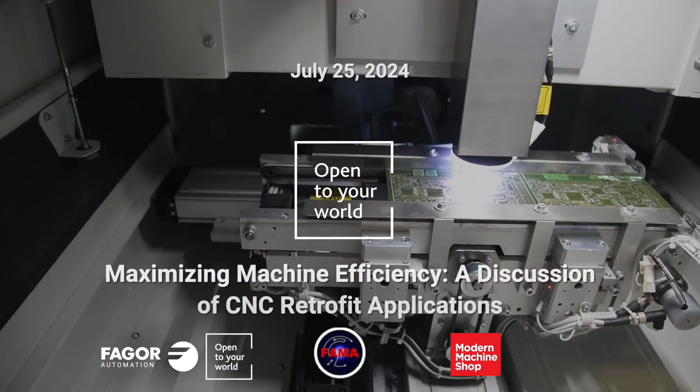Good afternoon, everyone. We're thrilled to welcome you here today for our Modern Machine Shop panel discussion on the benefits of CNC retrofitting, as well as some compelling case studies.

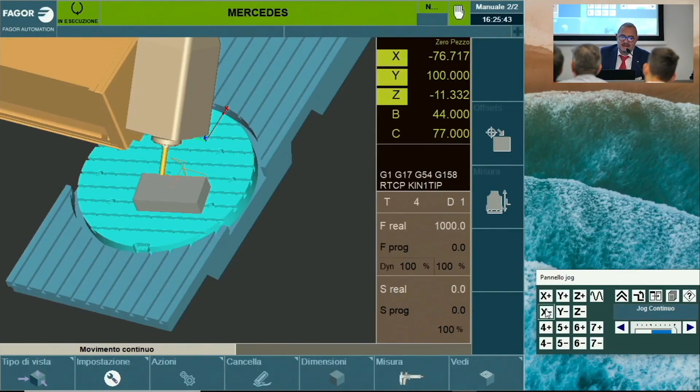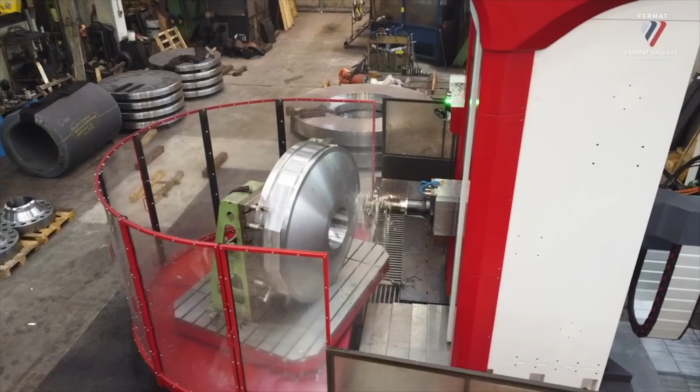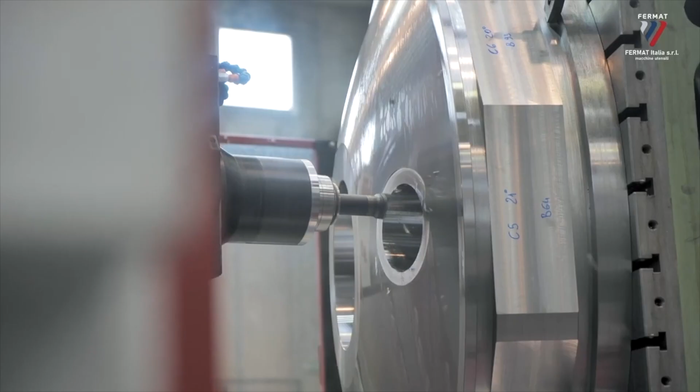Now, back to the topic at hand. There's no denying that investing in a fresh new machine from an OEM can be a game changer for any business. The latest models come with cutting-edge technology, advanced features, and enhanced capabilities that promise to boost productivity and precision. New machines can streamline processes, reduce downtime, and deliver superior performance, making them an attractive option for companies looking to stay ahead of the competition.

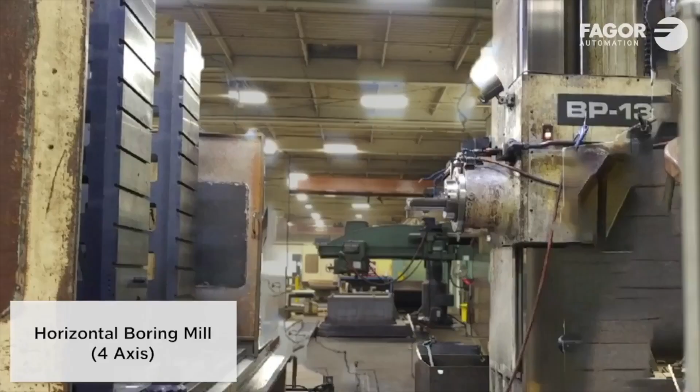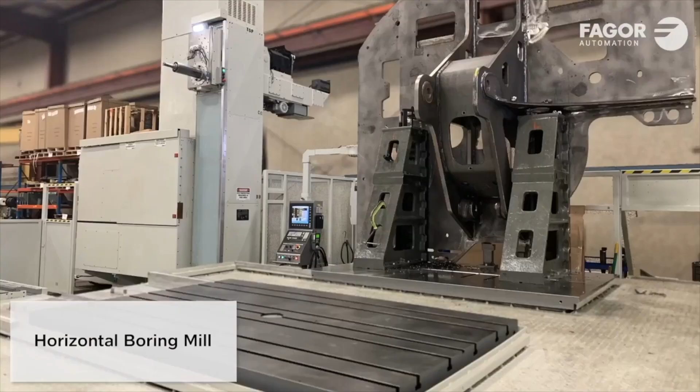However, it's important to consider the strategic advantages of retrofitting existing machines. Retrofitting offers a cost-effective alternative that allows businesses to leverage their current assets while reaping the benefits of the latest features and functionalities from modern technology. By upgrading control systems and components, retrofitting can significantly enhance the speed, accuracy, and reliability of older machines. This approach not only reduces the financial burden associated with purchasing new equipment, but minimizes production disruptions during the transition period.

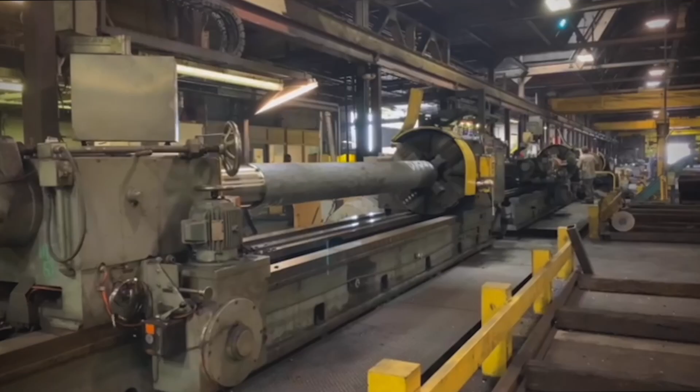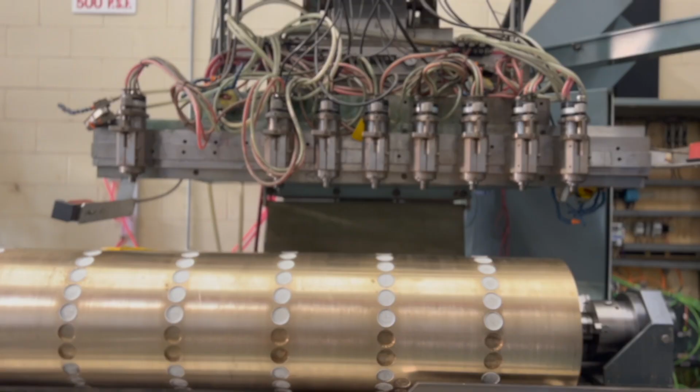Fagor Automation relies on our network of factory-authorized integrators, FAIs, when it comes to breathing new life into existing equipment. Today, we have an FAI expert that's not only worked on a large variety of machines, but has exclusively offered Fagor controls since the inception of his business. Local to the Chicagoland area, we have Farzad Ahmadpour, President and founder of FAMA Technology. He will be sharing his insights and real-world case studies that highlight the transformative power of CNC retrofitting.

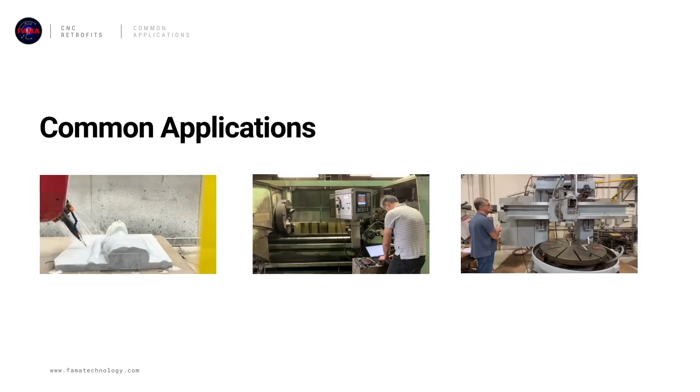Can you tell us a little bit about FAMA Technology? Right. FAMA Technology started in 2012. And Fagor has been our main activity, as far as installations, services, and everything since we opened up. We have had so many retrofit projects across the country, from west to east, from north to south, everywhere, in different factories, small and big. We have had different types of machines that we worked on during many years: lathe, mill, grinding machines, honing machines, even folding machines that we retrofitted as a whole machine. So we used Fagor in any type of machine that you could imagine, pretty much. So FAMA is an exclusive Fagor factory authorized integrator for a very long time. Right, for a long time.

Yes, our topic today is retrofit. So when does it make sense to consider a retrofit, or when does it make sense to buy a new machine? Why is retrofitting still an option people should consider? I think the most important part of a retrofit is you are actually trying to make the machine work to your benefit, to solve your specific problems.

Those problems could be like the machine breaks down so much, or it is obsolete, or you cannot find parts, or you really like your machine and the structure of the machine, but the controller or the electronics are not capable or modern enough for what you exactly want to do. You like the accuracy of the machine, but the machine doesn't, for example, operate good CAD/CAM software, or it's not very easy to use. You cannot find people that actually know how to program those machines.

Basically, to solve specific problems, you're supposed to use the best out of your existing machines. I would say the cost is the major component of this. So if you want to buy a new machine, you have to spend a lot of money, and you have to wait for a long time sometimes to get a machine. And when you get a machine, it has its own problems always. You know, it's not like magic.

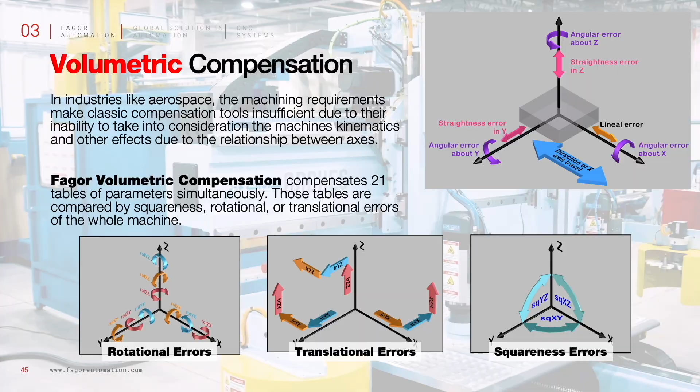So with the old controller, you could not even imagine to ask these kind of questions or solve these kind of problems. Yes, so this is a similar example to dual feedback. The volumetric compensation lets you bring the mechanically dated machine to the highest level of getting yourself a new machine. Right. And again, you don't have to move it, it's already in place, you have the same tooling. So yeah, those are the savings for our customers, for many machine tool owners.

When you retrofit a machine, you're going to feel like this machine is not magic. Everything is getting broken down to pieces so that you understand every piece. And then because you have this knowledge, you know what to expect, how to improve, or what you can do with your machine. I guess this is the most important part of this process of retrofitting. The magic becomes something understandable.

So what were the other tools and skills you used in your retrofit project history to gain those projects, to get that acceptance? I would say, again, because customers are different and the demands are different, we have to understand what exactly the customer is asking, and then try to accomplish that task. If it is accuracy, then you have to always be as honest as possible, because accuracy is expensive, always. You have to go back and try to explain the whole situation.

So if you explain the details and educate your customer, then the customer is going to have a very clear mind and can choose very wisely. Yes. If it is worth it to do that or not. So it won't be a black box for them. I guess our key success point is we are not making anything a black box. We are ready to explain every single detail that the customer would like to know.

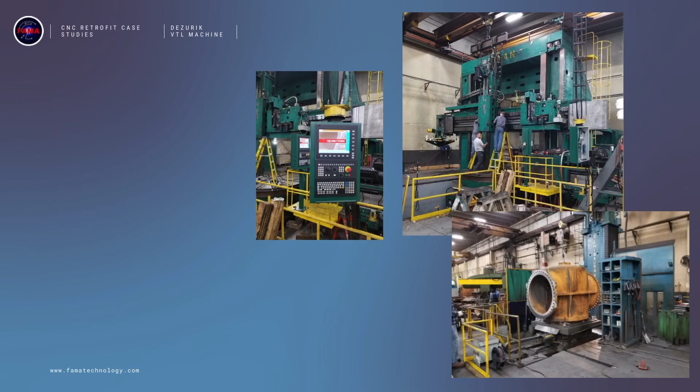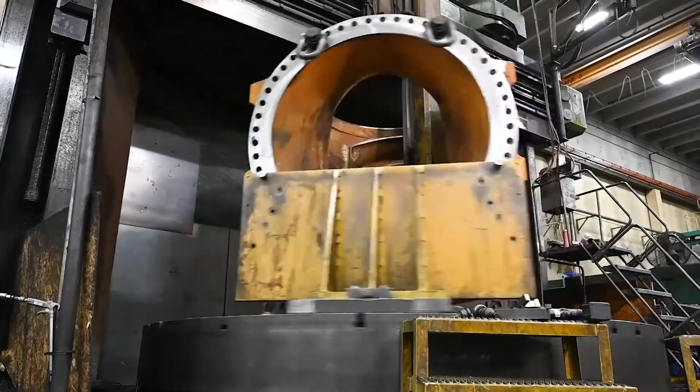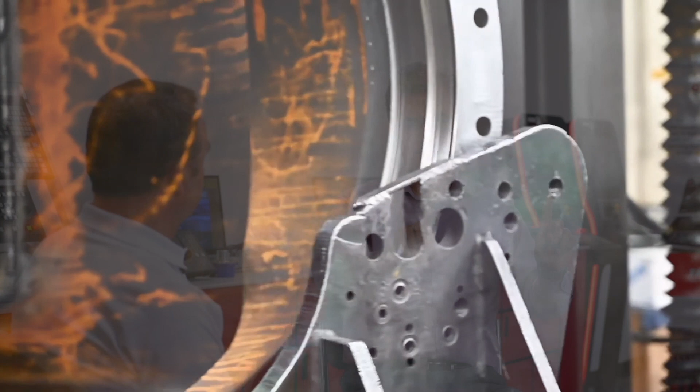One was a very large VTL machine with 3 spindles, 3 channels and 11 axes, and a rotary table that could precisely stop, because it was a tandem C-axis. It could unclamp the C-axis and the spindle would kick in and it would be like a VTL. And it had side milling, and the whole table could come out like a Y-axis and in. So basically you could do off-center.

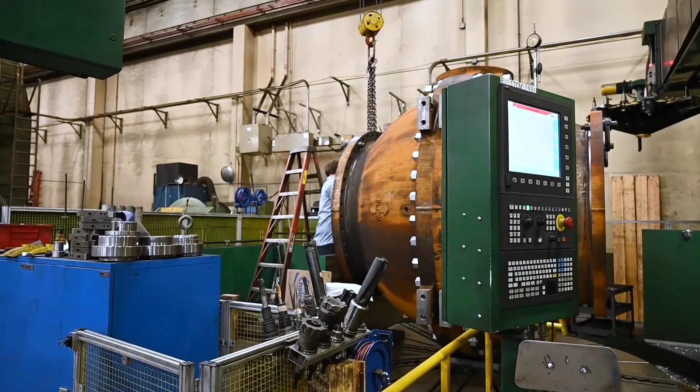So it's not only multi-channel, but a dual-purpose machine. This has milling and turning heads. Exactly. And it had a tool changer, actually 2 tool changers. So this is like the most complex thing that you could imagine on a machine: multi-channel, large machine, tandem axis, 11 axes that machine had. We put scales on all the axes. Actually, it was a major retrofit.

We actually rebuilt the machine too, scraping all the beds, changing all the ball screws, everything. So it was a major retrofit and rebuild. And the machine was a Titan machine made in Romania, I believe. Yeah, Eastern European, one of a kind. They made only one machine and that's all. They didn't make any other machine like that.

So if you want to buy a machine like that, you had to find somebody who actually understands the whole process and then make the machine for you, if they ever would. So they bought the machine. The machine had a Siemens controller, but outdated. And we actually replaced the whole electronics, drives, motors, scales, everything, PLC.

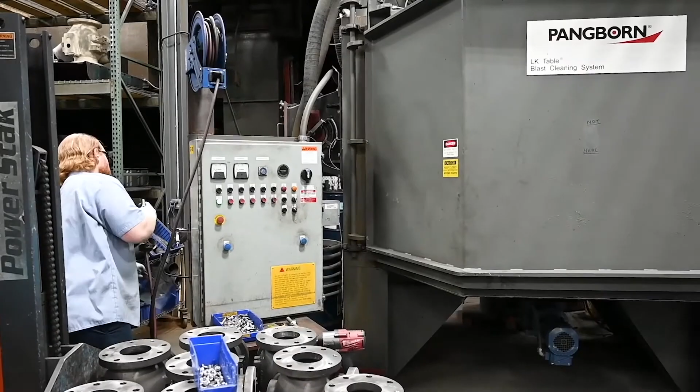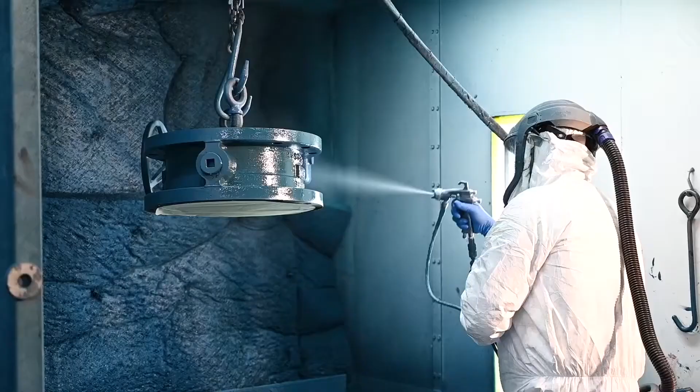So this would be in my progressive retrofit kind of story. This will be the full package. This is your end goal, when everything is brand new on the machine. Everything electronic. Exactly. And the machine had to make 4 different parts as quick as possible, like very large valves, for, I guess, a Canadian government water project or something, as many of them as they wanted.

And then the machining process has to be cheap enough so the customer would accept. So that means speed. You needed speed. So I think the saving is also because being a dual-purpose machine, you can hold the job on one setup. Exactly. And without moving the job, mill from the top, finish the side, all the functions. Turn again. Yes. Do every possible live tool on the spindles. Live tooling. Rigid tapping. Oh yeah, many rigid tapping. And precision, because it had the O-rings, because it is a valve.

Actually, you've been helping me with this project. Right. Fagor helped me so much. One of the key factors was having 11 axis multi-channel configuration. We created the M codes to switch on the fly. What are you doing now, Mr. Customer? Are you milling? We have an M code for mill. Are you turning now as a vertical lathe? We activated the live spindle. We call only the axes you need on the screen, and you continue working on the same job using a different configuration. So our strength in this case was flexibility. We can offer on one CNC platform multiple setups.

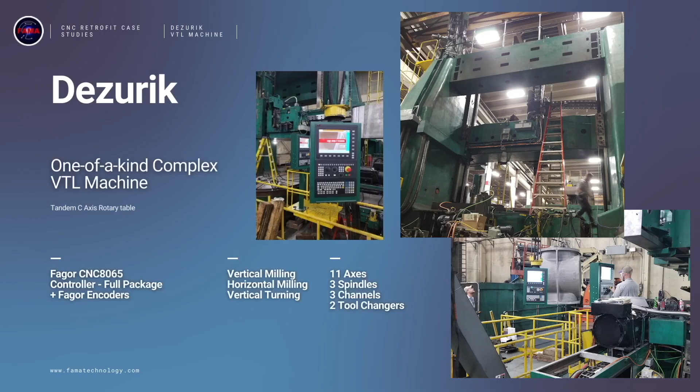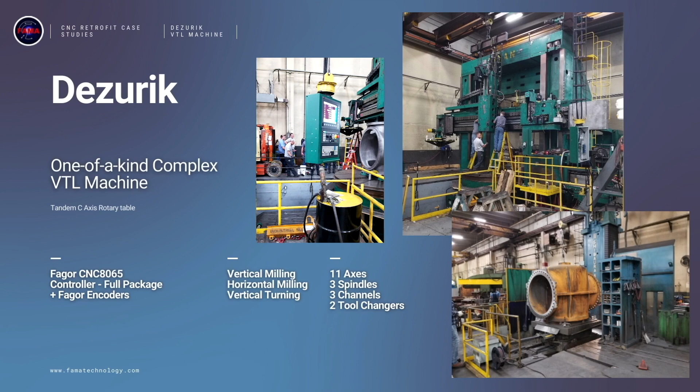And you had 2 different stations, actually 2 monitors, 2 keyboards, and controlling 3 channels in one place. On one side of the machine you could change the tool, you could do a lot of manual operation, and the other side of the machine was actually running a program. And then the other side would wait for this side for another program in that channel to kick in, and then they simultaneously work.

Actually, the programming wasn't easy for that particular valve or the valve sets that they were making, but after it was done, the machine was just producing without stop, no intervention. So you have one setup, you finish the part, and you put the next one, and the next one. Otherwise, you had to move the part, and the errors and inconsistency that you may get from one part to the next, all of that. So the retrofit was the only option in that case.

Or buy a new machine, but this kind of machine would be not only expensive, but very long delivery. Exactly. Up to probably 1 or 2 years. Oh, probably not even possible. If you want to buy a machine like that, someone has to design the whole structure, and it probably will be like $10 million. How about custom made? It won't be cheap. It will be, that I can tell.

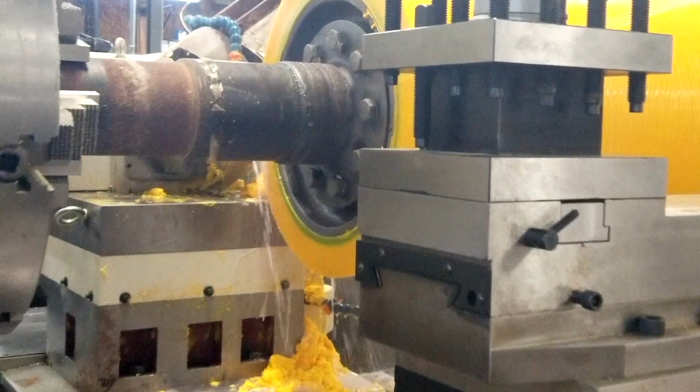So what are the other cases of the strength of the package and your very modest knowledge of tuning, to help you get the goal? Sure, yeah. One of the other projects that I'm really proud of is South Bend lathe, actually 2 of them, now 3, grinding on rubber. So they had to cure rubbers on very large cylinders and grind it to a bulged shape, concave or convex, and with a pattern on it, and that was a production machine as well.

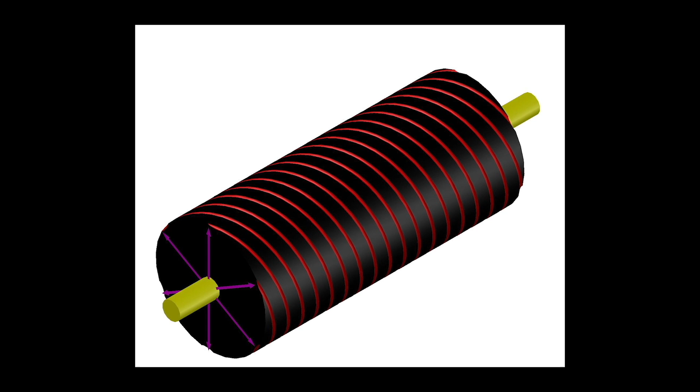And they wanted to program everything with no programming knowledge. So we had to make the machine as flexible, as accurate, and as easy to use as possible. So through the menu, like a user cycle HMI. Cycles, exactly. So we developed 5 user cycles for setup and for different operations. With a saw, they had to make patterns in a spiral, and then it would go the other way, and you had to stop in the middle, but they would punch some numbers on some screens that we designed, and voila, you have your part. So no need for CAM software.

At the end of the day, the owner of the machine can hire a new operator, teach them how to run it, enter a couple of parts, and in a couple of days they could actually run that machine.

If you wanted to write a CAD/CAM program for any of those parts, it would be thousands of lines and very sophisticated 3D modeling in a computer, and then posting, and if something has to change, you have to go back, change it, and post it again. But there, you just punch a number, change the radius, or the bulge, or whatever, then start, and it does it.

First of all, you can have customized screens, and on the other side, you have a powerful enough controller that can do all the macros and sophisticated algorithms, with any formula you would think of. So just to clarify for our audience, our Fagor controls are capable of running G-codes and Mastercam or CAM software post-processed, XYZ generated programs.

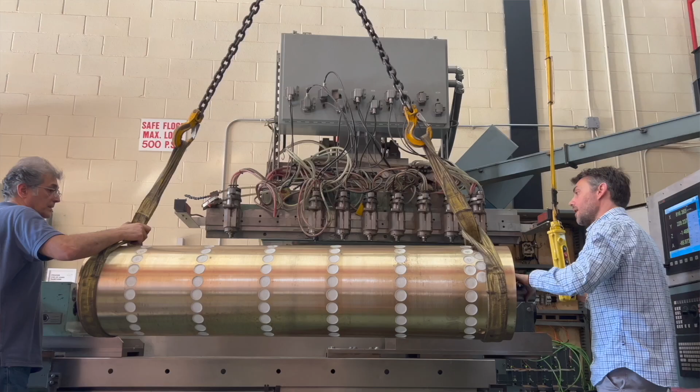Even for the cookie die machine for Oreos. Yeah, that was another project I want to explain. There is a company that would like us to do the rest of their machines. We just finished one. They make rollers for the food industry. Heavy parts. Very heavy parts, exactly.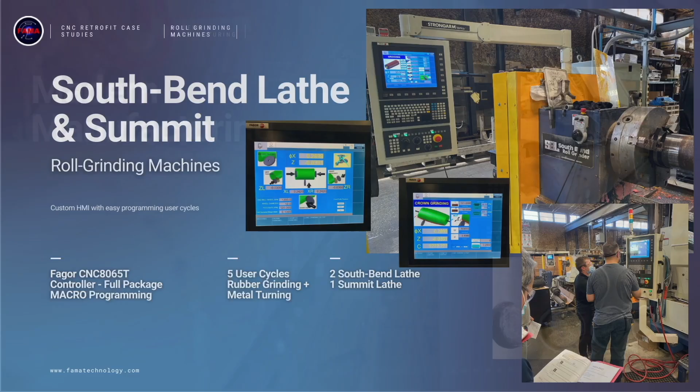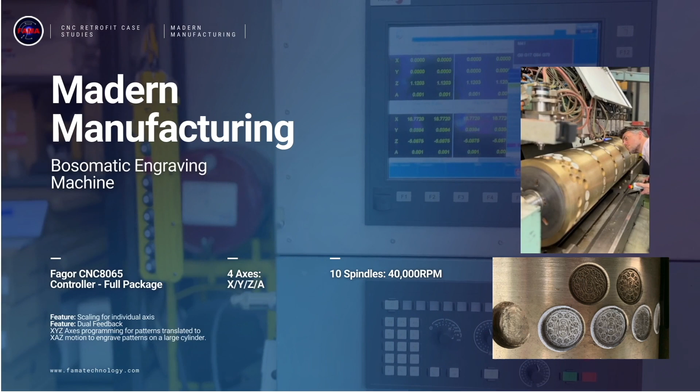They make millions of, let's say, chocolates. You have a little cavity, and the chocolate or material flows onto it, then it rolls and is frozen to a very low temperature inside, so it solidifies really quickly, and then it turns, and a little nozzle pushes out the cookie, an Oreo, for example. So it's a mold for the food industry.

Right. But the challenge is two things. First of all, it has to be done very fast. So intricate design, and many of them. Yes. So you have sometimes, like in those M&M's, the little chocolate thing, you have 1 million cavities in one roll. Yeah. And you have to make 1 million cavities in 1 week.

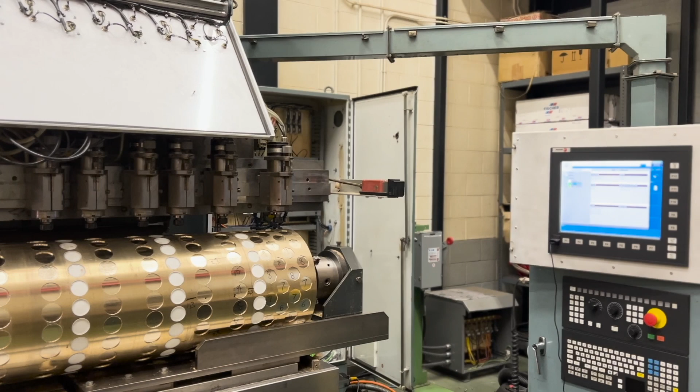So to be able to do that, you have to have multi-spindles, and you have to set the spindles to a certain distance, and then they have to work together. So that particular machine had 10 high-speed spindles, like 40,000 RPM spindles, and they had to work simultaneously with the roller turning and the XYZ moving at the same time, and it had to have enough accuracy and speed to do the job properly. And we have done one, and hopefully we're going to get another 5 and then another 9.

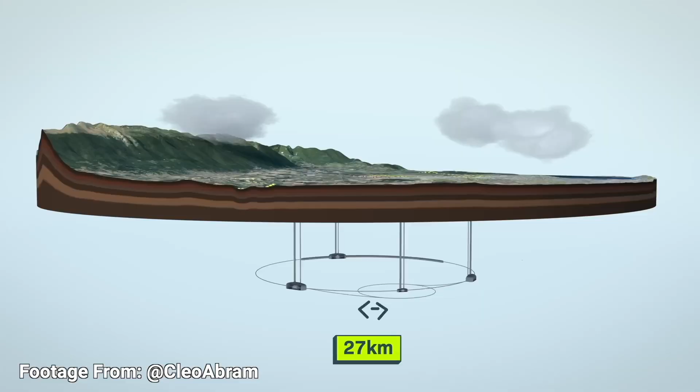Have you done any projects at universities or schools? Yes, we have actually done an automation project with precision motion control to make parts for CERN. CERN is actually the largest laboratory for high energy physics, on the border of France and Switzerland, and the largest particle accelerator.

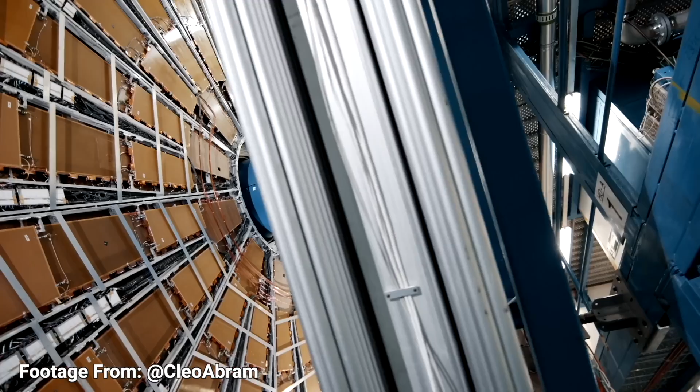And we are making some mirrors with reflective material that has a 99.99995 reflection rate, and we're making 100,000 or 120,000 precision mirrors with a machine that we designed. Actually, they designed it and we did the automation part of it. So to make those mirrors, to send to CERN in Europe to actually capture dark matter.

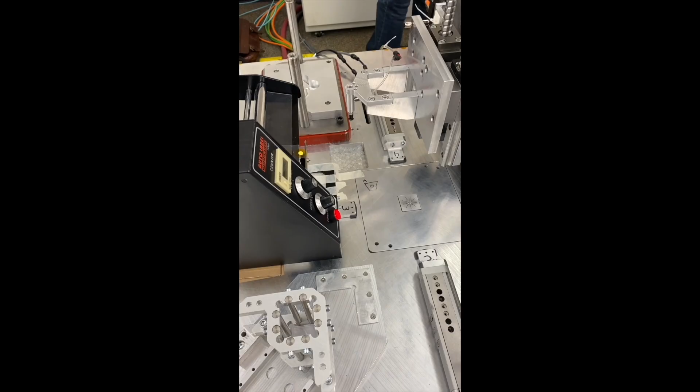But where's the machine? The machine is in NIU, oh, okay, the Northern Illinois University, and the physics department and the engineering department are taking this project, and they did the design. We had so many interactions with them, tried to help them do the optimal design and everything. It's an automation with precision motion to wrap those mirrors around some little pieces of plastic.

And it had to cut the foil, that 99.999% material. So those are like production parts. They have to produce a lot, really, really quickly and very, very precisely to wrap around. There was a little electronic inside of that mirror, and the whole giant array of mirrors is supposed to reflect back to the little electronic sensor, like a CCD sensor, to collect the information after the particles hit each other, to find out if dark matter exists or not. So if somebody wants to see the machine, it will be in DeKalb, Illinois.

Right, right. So in conclusion, from all those applications we discussed, what lessons can you give to the prospective integrators who are probably watching this webinar today? So I would say the most important thing is, if you have a problem, don't try to live with it. A problem has to be solved. If you want to solve your problem, you have to find the right people and the right technology to do that. The solution of the problem might not be reachable, but that doesn't mean you have to ignore it. You can probably always find a solution for any problem.